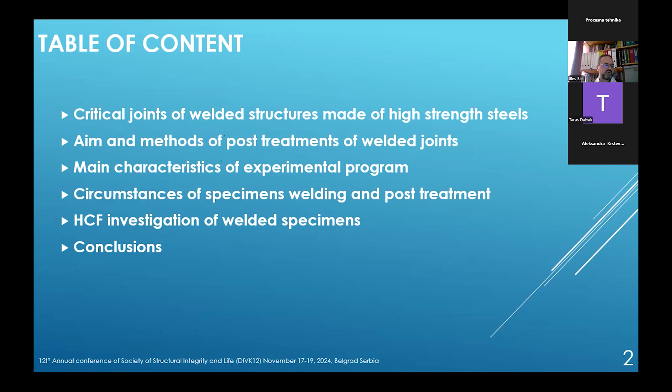First of all, if we consider what the criticality is and why welding of high-strength steels is critical, we have to use two approaches. The first approach is the manufacturing point of view. The first and main issue is that high-strength steel materials are really sensitive to cold cracking. Therefore, a really narrow gap is required to keep the t8/5 time; in some literature it is between 5 and 10 seconds or 5 and 12 seconds. It gives a really narrow area from a welding point of view.

And also we have to apply preheating in case of quenched and tempered high-strength steel materials. The other problem from the manufacturing point of view is low deformability, because if we compare with mild steels like S355, we recognize that the elongation is less than a half or nearly a third of S355. This deformability we also have to consider in the selection of the welding wire when we set the welding technology.

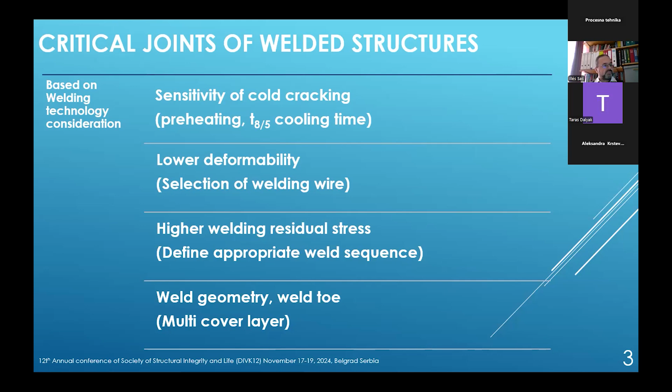And if we consider the operational point of view of these welded joints, in many cases, like in mobile cranes, the welded joints are under fatigue load, and based on the preliminary analysis during the design phase, it's planned to move the welded joints out of the highest critical areas, and that is how we are able to avoid high fatigue loads on the welded joints.

The other problem basically comes from the manufacturing point of view, but it's also sometimes considered in the operational phase of the structures: the delayed cracking, the hydrogen cracks. In our practice, in some cases, a week or 2 weeks after the welding, we recognize cracks. And during operation, under fatigue circumstances, delayed cracking can also be recognized in the welding zones.

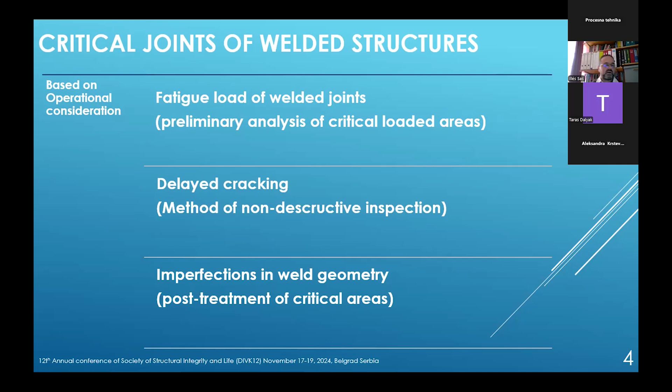Therefore, from both the operational and manufacturing point of view, we are applying non-destructive testing, implemented 2, 3, 4 days after the welding to find the delayed cracks also. And here we also have weld geometry imperfection effects; in some operational equipment we can recognize imperfections later, and these imperfections can also influence the fatigue strength of the steel structures.

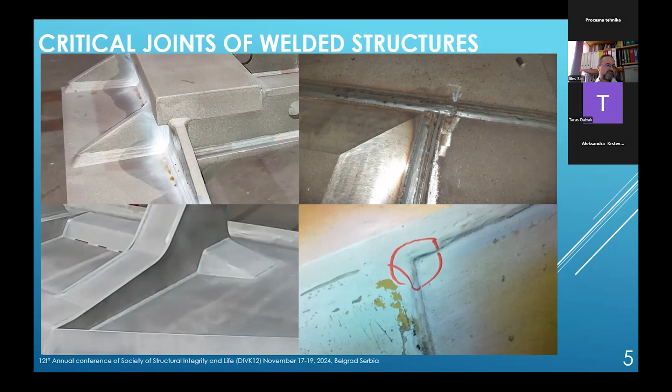There are some examples of produced welded structures where you can see that from the manufacturing and also the operational point of view, there are really critical zones like these ribs where we have three-dimensional strength properties, and also heavy plates with these cross sections where this area is the most critical. There are also some cases when we find defects in the corners. The weld toe area really has an effect on the fatigue properties.

If we move forward to the post-treatment methods, first of all, I want to open with the aim of the post-treatments we are investigating in my research topic. The main issue is to improve the fatigue strength of the welded joints. This is basically done with two approaches. One approach is to reduce the severity of the weld toe stress concentration by reforming the weld toe to eliminate the imperfections and give a much smoother transition between the weld surface and the material surface.

The other methods where we are also applying post-treatments are the residual stress reduction methods, where the target is to induce compressive residual stresses in the weld toe zones by applying different methods.

What is important in case of post-treatment is that some post-treatments can be applied not only after the manufacturing step, but also later when we detect imperfections during operation. If we make an analysis and it shows some criticality of these imperfections, post-treatment can also be applied during operating conditions to increase the fatigue life of the product.

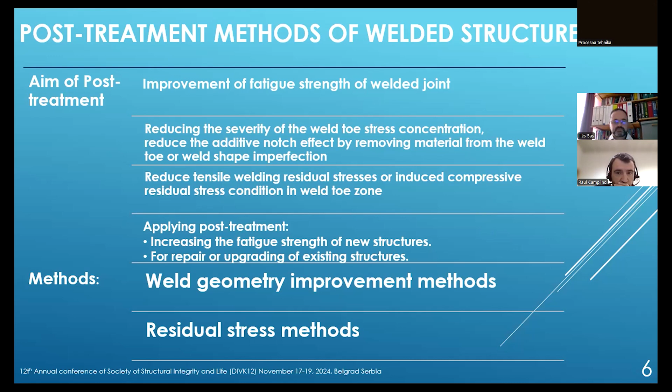Based on this, we can call them weld geometry improvement methods and residual stress methods, which we are applying to high-strength steel materials. Sorry.

And based on this analysis, I also made some studies to investigate different post-treatment methods, and we started to develop our experimental program setup, which is based on three main influencing parameters.

The first influencing parameter is the welding technology. It is basically influenced by the steel grade, the welding process, the welding position, the welding condition, and also the welding technique, what I'm calling the cover layer, because in case of heavy plates it's a multi-layer technique, and not only between the material and the weld metal do we have a weld toe. We also have weld toes between the layers, which also has an influence on the fatigue life.

The other main finding in our preparation of the experimental program is the effect of the welding specimens: if we develop different kinds of welding specimens, then we can compare the effect of the post-treatments in different types of welding joints. And of course, from the experimental program point of view, the post-weld treatment itself, which we are investigating, is also the most significant parameter.

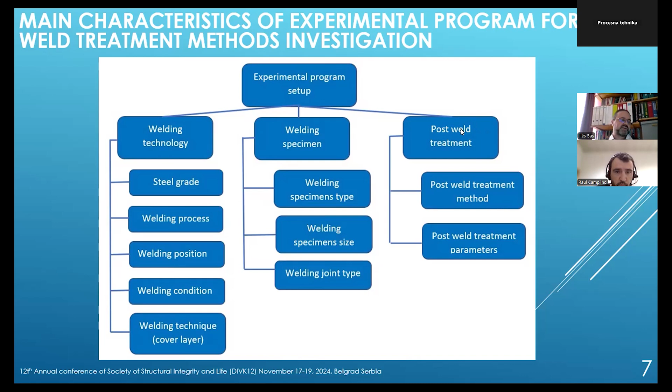Based on this, we started to develop the welding inspection program. First of all, we defined the specimens, what kind of typical specimens we are able to investigate, and you can see here that for different welding specimen setups we have to divide these specimens between butt weld and fillet weld types. And also in the welding technique, the influencing parameter is the single layer and multi-layer technique.

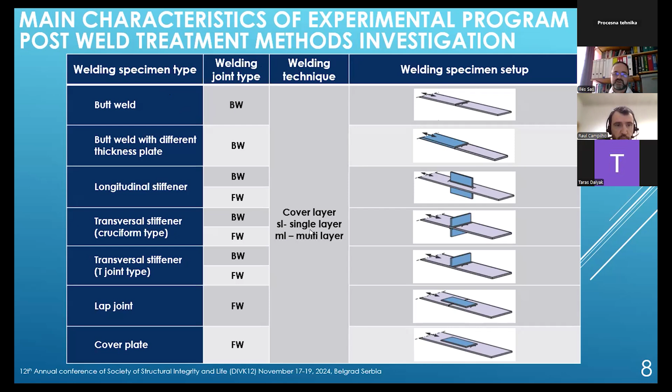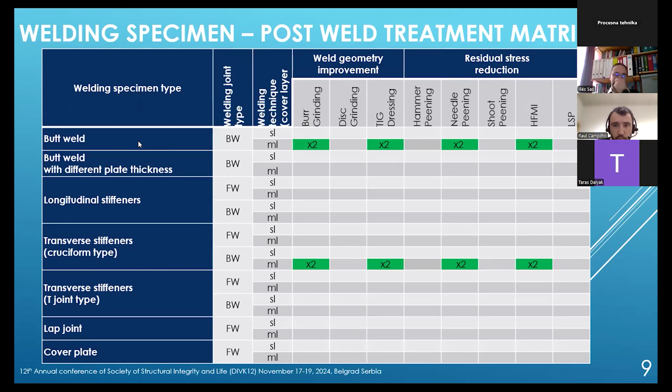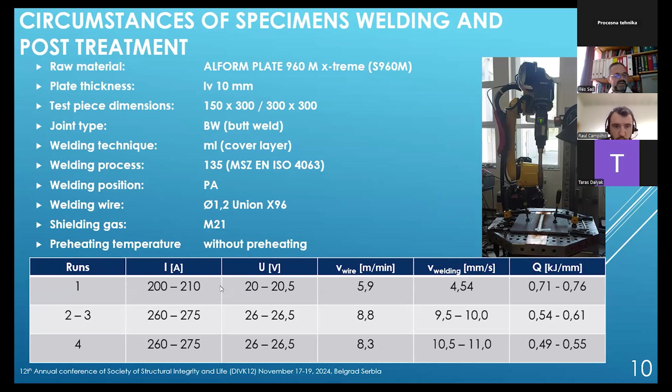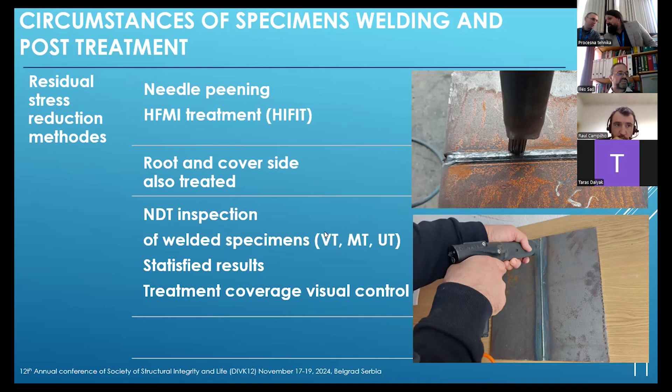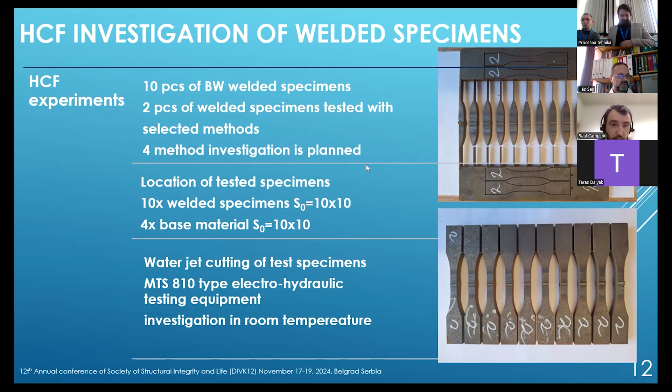After inspecting these specimens by visual, magnetic, and ultrasonic testing with satisfactory results, we started to prepare the test specimens for high cycle fatigue loads. For each welded specimen, we cut 10 pieces from the weld area and 4 specimens from the base material. The size is 10 by 10 millimeters. We applied water jet cutting to eliminate any influence of the specimen preparation method on the fatigue strength.

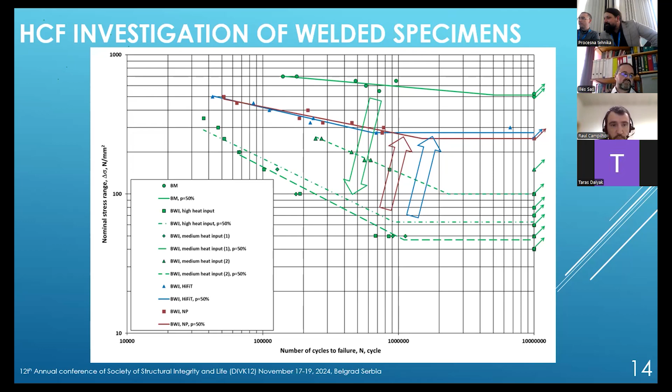As a summary, this presented methodology to set the experimental parameters is developed for further investigation of the post-treatments in different, standardized conditions. We also found that during the preparation of the weld specimens, we have to apply robotized technology to minimize the influence of the welding technology itself on the fatigue properties. And as I mentioned in the last figures, the high cycle fatigue resistance of the base material is better than the as-welded joint, and we detected a significant improvement when applying the post-treatment.

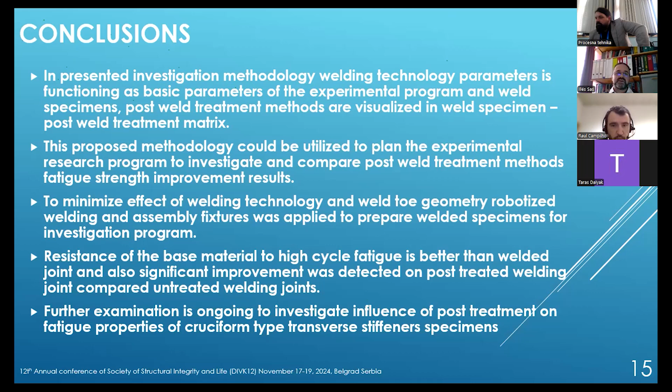We have an ongoing investigation, and as the next step, we plan to continue with the weld geometry improvement methods by TIG remelting and also burr grinding.